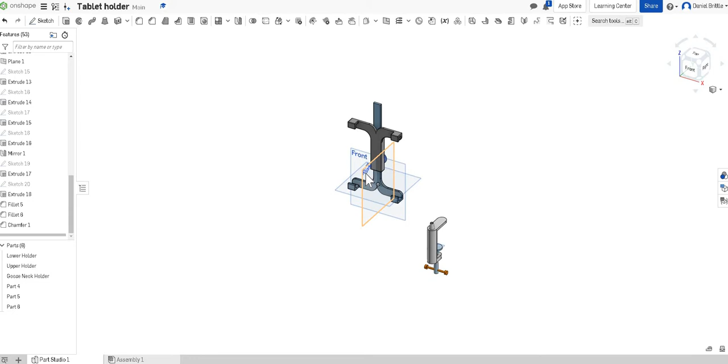To create the gooseneck that connects the holder with the clamp, it's really important that we created everything initially around the right work plane, and that we continue to do that so it lines up quite well.

Let's view it from the right, click on the right work plane and start a new sketch. We're going to create the ball at first that fits in here, and then the wire that comes down into the clamp. So let's draw a circle at first in this space here, and to make this a little easier we can change the view from shaded to shaded with hidden edges so that you can see the circle that sits behind there.

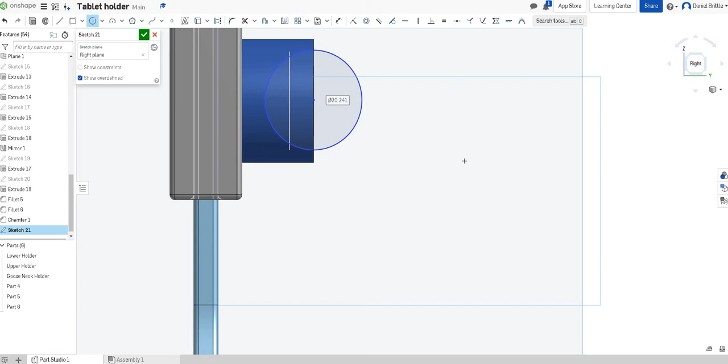Okay, let's dimension this so it fits. Our diameter was 17.5 and the distance from this bottom part here was 20. It's really important that you get these to line up really well. And then the final part that we needed was the distance from there, and that was 10.

Okay, we know that lines up, we just need to cut it in half so that we can revolve it about an axis. So we just use our line tool to draw from the centre to the edges. Use the trim to cut this part, not this. We're going to use a trim part to cut here, and then we can confirm that sketch.

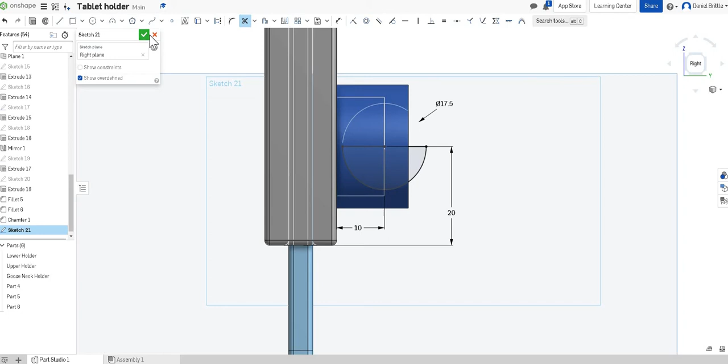We can revolve that around then using the revolve tool, select the face and select the axis, which is that straight line that we just drew. You can see it's creating the ball for our joint there as well. Okay, and it's a new colour so we know it's a new part.

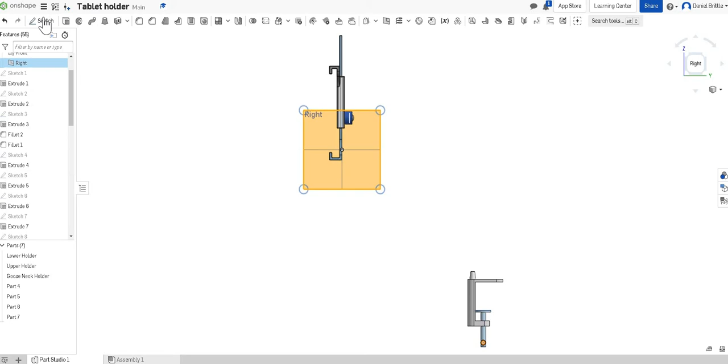We're now going to try and connect that down to the clamp. So we just carry on viewing it from the right work plane, new sketch. We're going to use a tool called a sweep, and to do that you need a path and then the cross section that you want to sweep down the path.

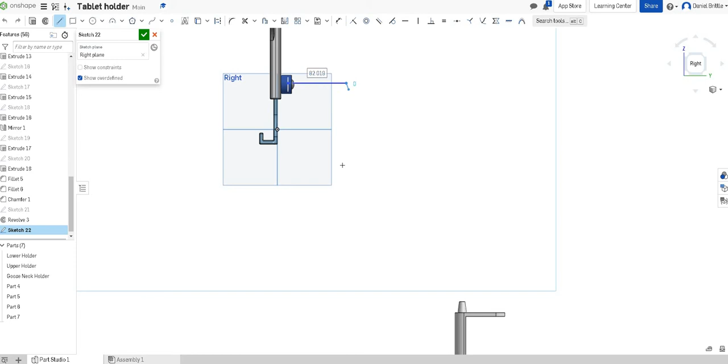So we're just going to use a line tool to start with. I prefer doing this to the spline, but you could use a spline I guess as well. So we're going to go roughly halfway from the ball, coming out here, and we're just going to wave this down quite randomly to start with before we throw some dimensions at it as well into the base there.

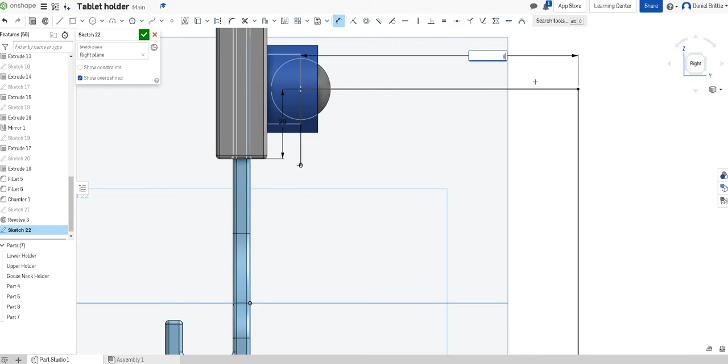Okay, we'll add some rounds to this in a second, don't worry, it's not going to be a square cable. So let's start dimensioning. The first thing is we want this to line up with that line there, so let's make that 0, and we want it to be coming out of the centre, so we want that distance there to be 20.

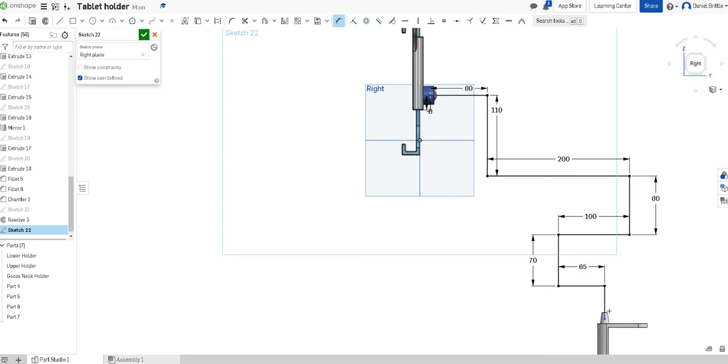Okay, we can then start dimensioning these lines, so we're working with rounder numbers. I'd make everything roughly 10, so nothing that's too difficult to work with in the end. Okay, so we'll just work our way through all of the lines until we said 65 there should get us to the centre, which is nice, and then 70 should get us to the top of that line.

In fact, if we delete that dimension, it'll be a better idea to dimension the distance from that point to that line and make that 0 so it fits perfectly.

We can then go ahead and use our sketch fillet and start to put lots of rounds in here that will start to look nicer. So that 20 we could change to 50, look quite considerable, and we'll do an even one on there as well. So we've got 50 there.

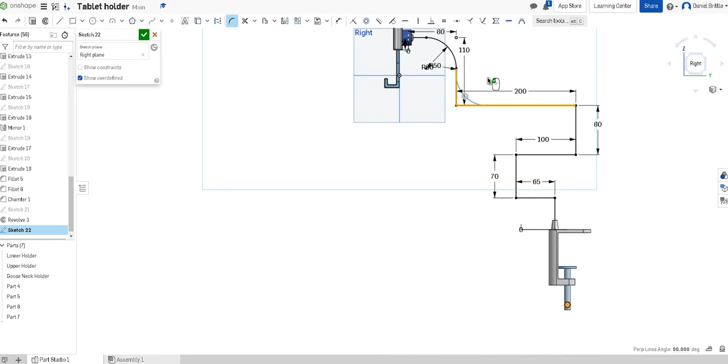And then this one will have to be different, so that's going to have to be 40. Let's change the others to 40 there, so we don't want that. We'll go Control and Z and Control and Z again to take that off.

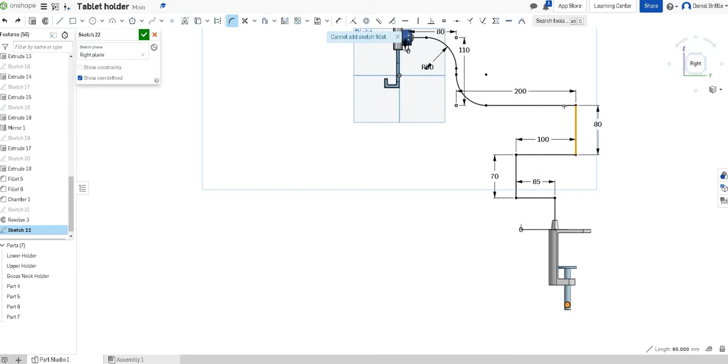We'll then start a new sketch fillet so we can dimension it differently. The reason we can't have this one 50 is because it's over halfway, and then it'd make the other uneven, so 40 will look nicer there, and then this one can be exactly 40 as well.

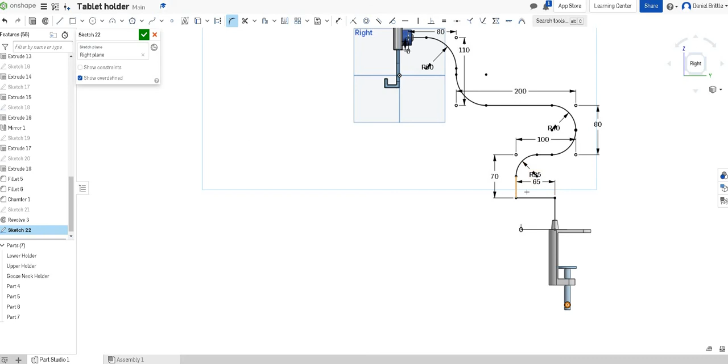Okay, we're then going to start a new sketch fillet again, because this one's going to be 35 this time, as is this one here, and then the last one on here is telling us there's a problem straight away. So if we escape that fillet, start a new sketch fillet, and that one's going to have to be quite a bit smaller.

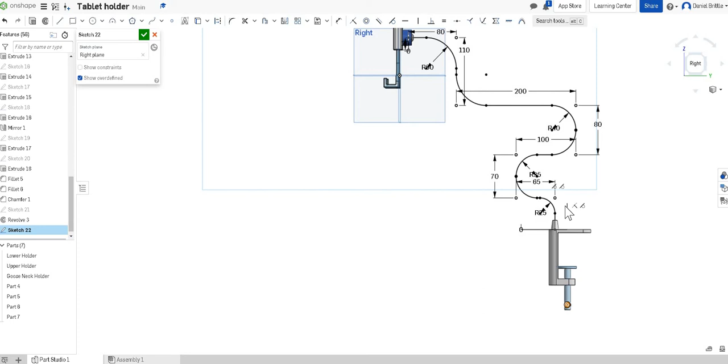So we make that 20, in fact it could be 25 and it'll still look okay. There we go, now we've got more of a wavy line connecting, we can finish that sketch. My dimensions there were just me choosing random dimensions - you can choose any random shape that you want. You could do it in a much straighter line if you like, just have it coming out perpendicular for it to look best.

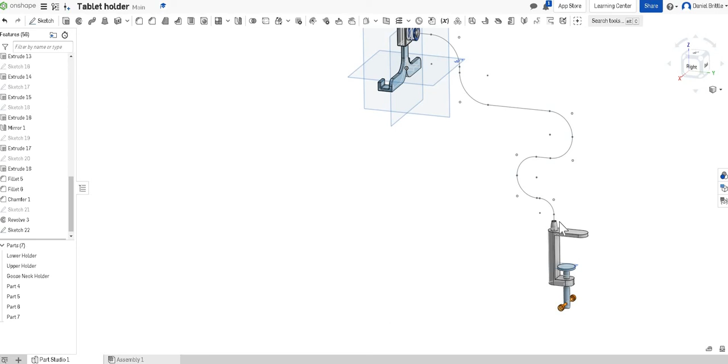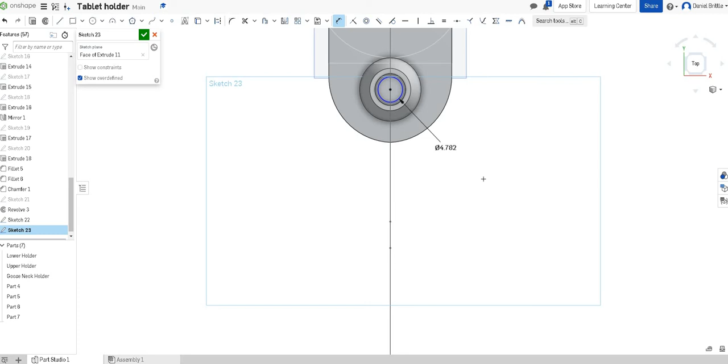We're then going to have to create a second sketch. The second sketch will go on the bottom here, 6mm, to sweep out of this shape. So we're going to sketch on this work face, and then look down at that from above. Zooming in, we can draw a circle from the centre there and dimension that the same as we made the hole - dimension the diameter at 6mm.

That's done, so we've got our two parts that make a sweep - the shape that goes along the line, and the line that you want the shape to go along. Now the sweep tool is this one here. It's faces that you want to sweep - so that was the second sketch that you did, and the path that you want to sweep it along was the first sketch that we did. You can see it'll just throw that circle along the line, and we're happy with that.

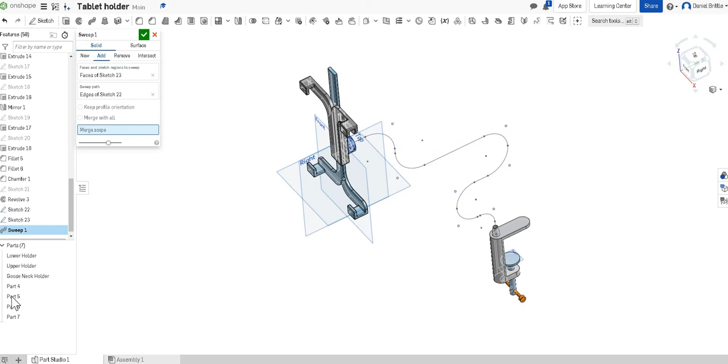The only thing is we want to add it to our part 7. Click tick. And once you've added that to part 7, you can see we've got that wire coming out that connects the two parts together, and it does look a little bit skinny.

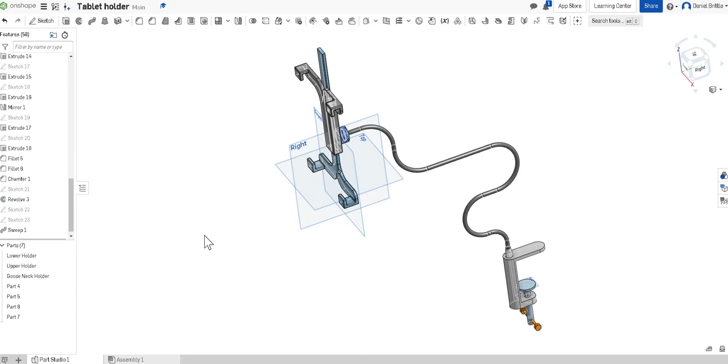So to combat that, we're going to go back in and edit this. We'll edit our sketch - this is a good bit of learning actually about going back and editing old things to develop ideas. Going back into this part here, we've done it as an extrude on here, this sketch 20, so we're going to edit sketch 20.

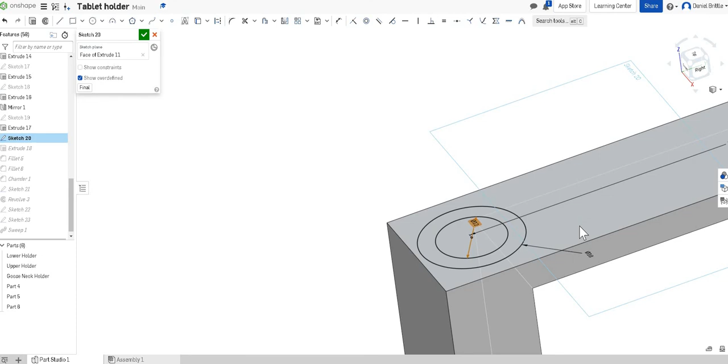We're going to zoom in and make the outside 20mm, because that still shouldn't hit the edge. It's hitting that edge there a little bit, so we're going to reduce that maybe 18mm, leaving that bit of a gap. And then this 6mm can become 12mm, and it's going to be much chunkier. In fact, it might be a bit too chunky, so we'll take it back down to 10 and click tick.

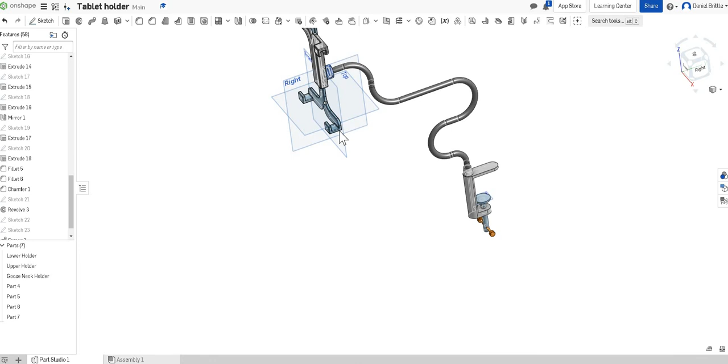You can see now that we need to edit the circle that we did the sweep on - sketch 23 was that circle. We're going to edit it, and that just needs to become 10mm. When we click tick and update, it'll then sweep that along the path, and that wire looks more robust, looks much better. So the final thing now to do is edit the appearance.

So we'll change it back to shaded, and then we can have a look and see what colours we want. I actually want these two parts to be the same colour, and the clamp as well - the plastic part of the clamp I'm going to have the same colour as those. So I've highlighted all three by holding Control on my keyboard, right click, and now I'm going to edit the appearance for the three parts, and make them a red colour. That's going to be my brand.

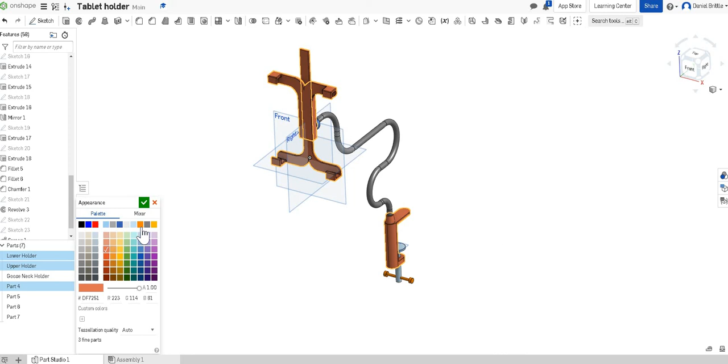In fact, I like that orangey colour better, so I'm going to click that one and click tick.

The next parts around the back here, we've got this attachment. I'm going to make that a very different colour, to make it stand out a little bit. So I'm going to edit the appearance for that. Because it's actually something that a user has to interact with, I'm going to make it bright pink so it stands out and they know they can use that there.

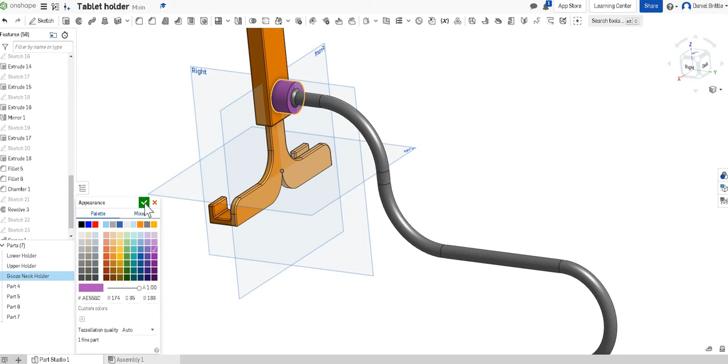Then the part here, the gooseneck, I'm going to change the colour of that as well. I'm going to edit its appearance, and that's going to be quite a pale grey to fit the theme.

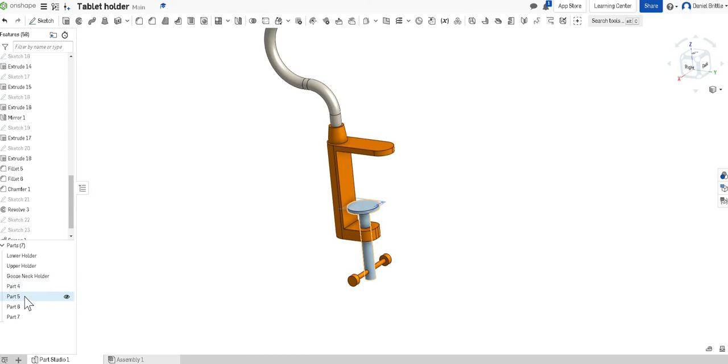And the last parts in here are these, which are metal parts, so I'm going to change them to be metal parts. Holding Control and select both, right click, edit appearance for two parts, and they're going to be quite a dark grey colour. Click tick, and now when you want to look at what you've created, it looks far better because you've selected these colours.

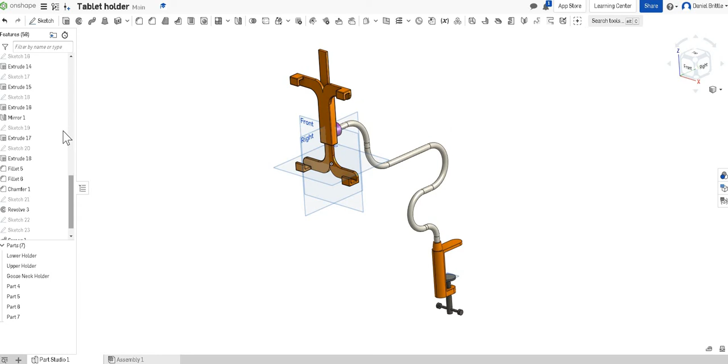What we can do as well to make it look better for a screenshot to add to a portfolio, we can actually hide all of these planes and the origin point, so you're only seeing the parts that you've created. You just have to make sure as well that you hide the new planes that were created further down, so that you're only seeing what you want to see.

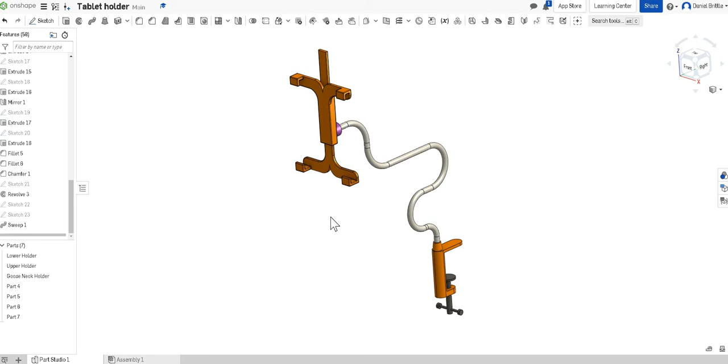And there we go, we've got our tablet holder. We'll look at assemblies in the next tutorial so that we can see how all this interacts and moves together.